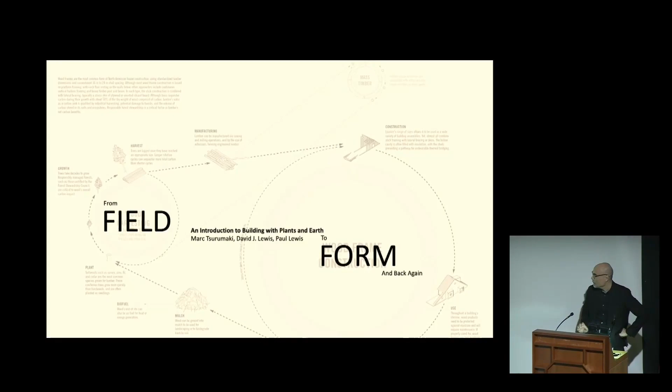If we look at the amount of carbon related to buildings, essentially it's 39% of global carbon emissions that could be subdivided into operational carbon, in other words, the carbon associated with the energy needed to heat, cool, and otherwise operate our buildings, at 28%. And then embodied carbon, which is really what we're going to be talking about primarily tonight, which is the carbon associated with building materials and construction. In other words, embodied carbon is the physical matter of architecture.

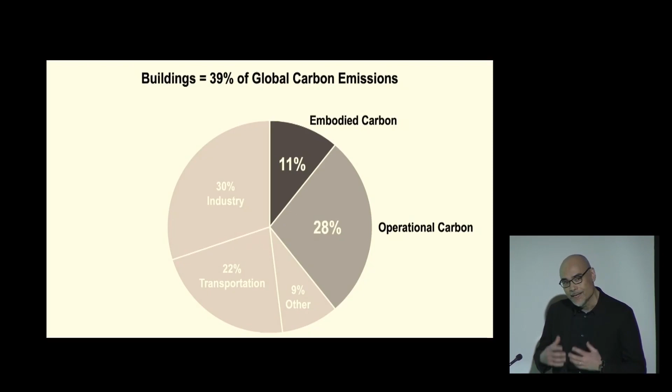Now that 11% may not seem terribly substantial, but if we look at this relative to the very tight timeframes that are required to avoid the sort of predicament that we're in, the percentage of embodied carbon moves to about half of the total carbon emissions that will be associated with new construction across the world in this critical time period of the next 30 years. And if we think about the impact of more energy efficient and highly thermally performative buildings, the importance of that embodied carbon increases. It'll be about 56% in that context.

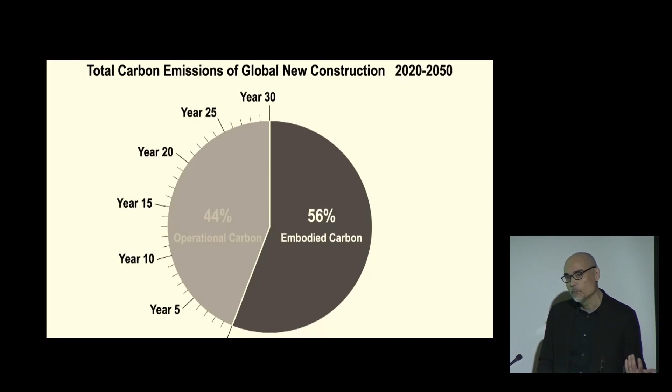So the other critical thing about embodied carbon is that it's upfront carbon. In other words, it's carbon that's already expended at the moment that the building is constructed. So it's already emitted or sequestered, whereas operational carbon accrues gradually over the lifespan of the building, placing even more critical importance on embodied carbon as a means to address the global challenges relative to climate change.

The other aspect of this, if we look at the next 30 years or so, in that same time frame, the predictions are that the world will be adding roughly 2.5 trillion square feet of new buildings. That's roughly doubling the global building stock in the course of the next 30 years, much of it in the global south. So whereas building less and reuse are really critical ways to think about reducing embodied carbon in the built environment, essentially this means we're not really going to reuse our way out of this situation, given the incredible demand for new construction.

So what does this mean? It ultimately means that we need to rapidly and radically rethink the material preconditions of our architecture. We need to rethink the ways in which we build and what we build with. This also means we need to reassess the legacy of modernism as it's been globally disseminated and its reliance upon concrete, steel, and glass, which are not only three of the most carbon-intensive materials, but also participate in cycles of linear extraction that have devastating impacts on environments and inequitably distributed effects on human health. It also places the architect as a kind of consumer of building products that are assembled into architectural form.

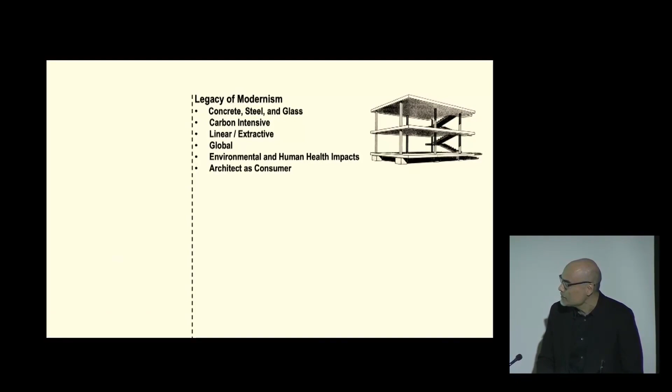By contrast, biogenic and geogenic materials require minimal carbon related to their minimal processing, and in the case of plant-based materials, literally sequester carbon within their very cell structure, allowing for the possibility for architects to reconceive their role as part of larger material cycles of flows of energy and matter within the environment that can actually have positive benefits relative to regenerative cycles.

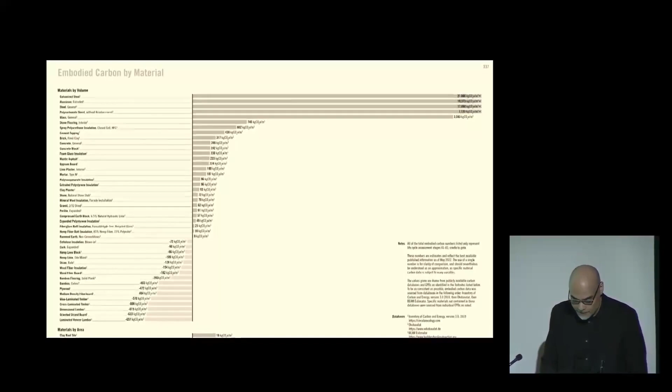And if we look at the carbon implications of this, one of the moments of good news in all of this is that these materials are already here. In other words, they're readily available, they're globally distributed, they're widely accessible, and often are the byproducts of other systems, agriculture, for example. And by and large, we already know how to build with them.

So they're inexpensive and plentiful, and they also offer up really amazing opportunities for rethinking the architectural basis of many forms of construction. In the case of the Manual of Biogenic House Sections, the publication that Rosalie is mentioning, we examine specifically the impacts and use of these materials to develop innovative architectures in the form of 55 houses culled from around the world. And this leads to another question, of course, which is why are we talking about houses? What's the relevance of the house?

It's part of the problem, arguably. We should be building less single-family houses. But in fact, the house, precisely because of its scale and its ubiquity, offers a kind of fertile proving ground for new material economies and for rethinking the ways in which we build.

And if we look at the impacts of roughly 1 million homes built annually in North America, shifting the ways in which we think about the material conditions of houses can have correspondingly substantial impact on the built environment relative to climate.

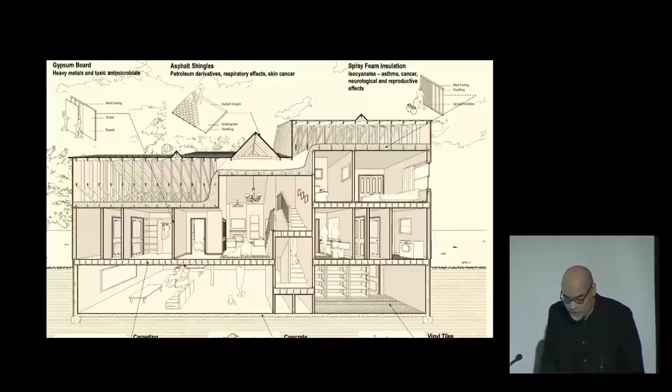But the way houses are built now is highly problematic. They've essentially more than doubled in size over the course of the last 75 years, and they're filled with toxic materials from heavy metals in gypsum board to PVC in vinyl tiles. These materials are predominantly the byproducts of the petroleum industry.

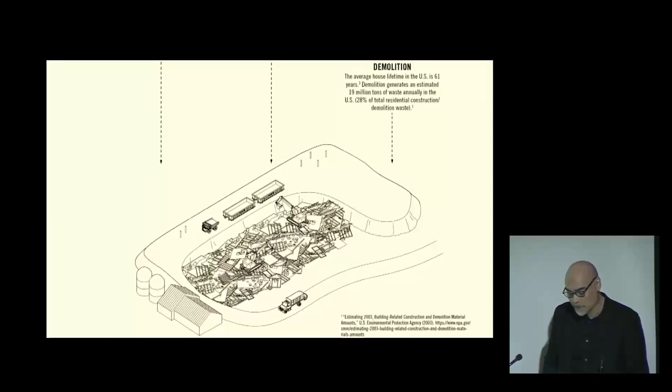They participate in take, make, and trash cycles, which are non-renewable and ultimately mean that most of these materials end up at the end of life as demolition waste and landfills. If we look at the composition of the wall, we start to realize why this is the case.

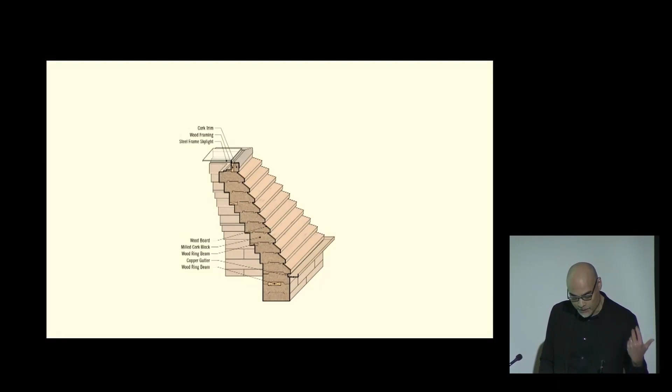So houses built with plant and earth-based materials frequently exhibit characteristics of extreme thickness, opening up the possibilities for a revitalized relationship between architects and questions of mass. They often exhibit a reduction of the number of material systems involved and tend towards the monolithic. So frequently in these buildings, a single material performs as structure, as skin, as thermal insulation, and as enclosure.

And these houses that we investigated also exhibit a wide variety of approaches to questions of interior and exteriority, gradients of relationships between inside and out, and nuanced relationships between the materials in use and questions of wear and transformation and entropy over time.

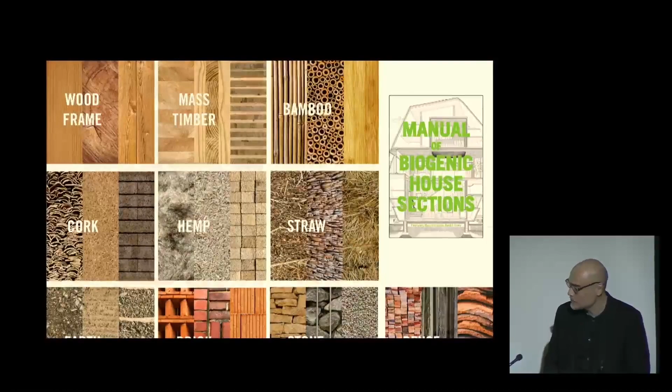The book itself is organized according to 9 chapters that correspond to 9 different material systems as well as reuse. And in each instance, we look at the carbon sequestering potential of the material and importantly, its relationship to life cycle, right? In other words, how do we go from the seedling to the plant to the building component to the house, back again through hopefully recycling and repurposing or back into the environment in harmless or regenerative ways.

So this is essentially the question of field to form, and it repositions the architecture not as a static artifact, but essentially as a temporary accumulation of materials that are part of a much larger circular logic that can be utilized to generate a transformed relationship between architecture and the natural world.

We also look at processing. So how does the tree transform into the truss, as it were? How do we actually look at the maintenance and care of natural ecosystems? And how do these processing conditions in terms of their intensity contribute to the embodied carbon or carbon sequestration of the material?

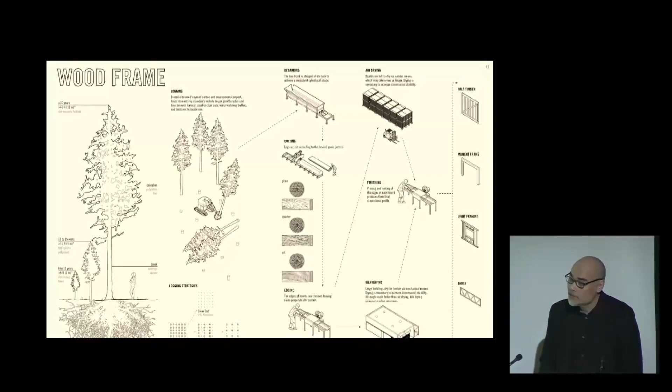And finally, we look through a series of axonometric drawings, photographs, and cross-sectional perspectives that were generated for the book at the architectural implications of these materials. So in other words, not only how do these houses simply substitute better materials for worse ones, but in fact, how do they actually use an engagement with biogenic or geogenic materials as a catalyst for new spatial and tectonic configurations, for new imaginative engagements, architectural responses to dwelling in the 21st century?

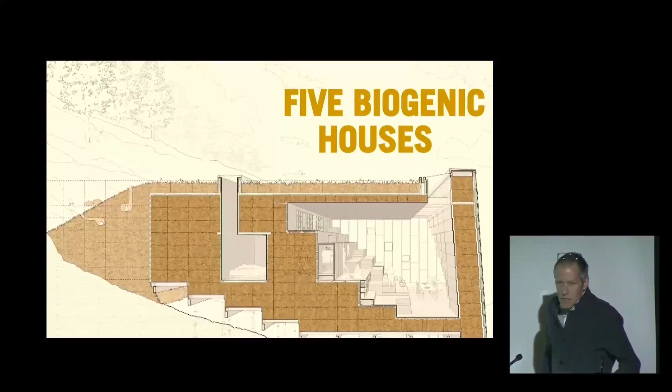So the project took 4 years of curating and collecting houses from around the world. And in that process, we also became curious as architects, how could we design from them as well? So we developed 5 biogenic houses, all plant-based, to explore the architectural implications through the question of field to form. Each of these tended to look at not one material, but actually combinations of materials.

In addition to that, we were interested in figuring out how that cross-weaves to the research we were already doing. So what I'll present and Paul will present is the material chapters, weaving together both the material from the biogenic house book, but also from our own design speculations on form.

First one is mass timber. Mass timber is in many ways the poster child today for plant-based buildings, because it easily seems to substitute for concrete and steel. But it has some challenges. Namely, it takes 30 to 100 years to grow, and in that process, even with certification processes, you have carbon loss in the removal of the tree and the disruption in the carbon in the soil, significantly offsetting some of the carbon sequestration benefits of mass timber.

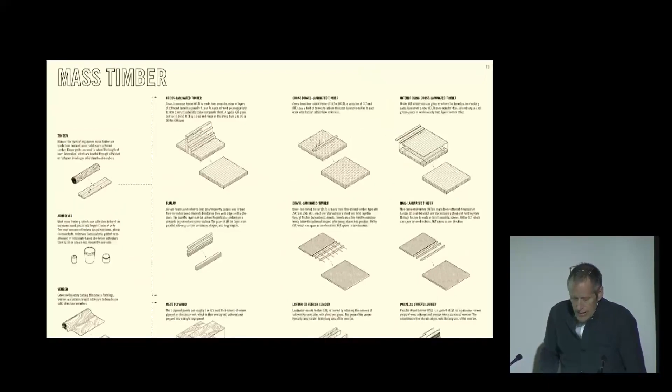You have in the mass timber the accumulation of different pieces, which also implies glues and their ability to be disassembled. That's why we're actually keenly interested in dowel-laminated timber, because of its capacity to only use wood and not use glue. The other is to pursue ways of thinking that isn't just a substitution for steel and concrete, but really exploring the capacity for mass timber to generate form.

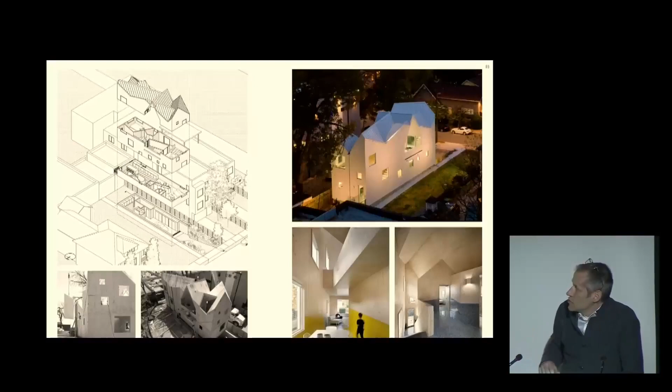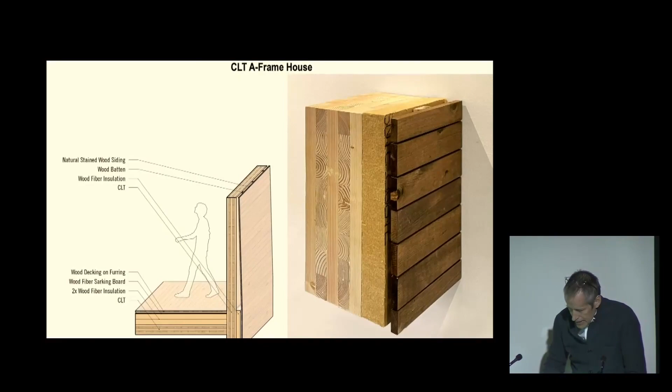In our own project, we looked at essentially how to really continue the exploration of the CLT plank, or the produced panel, in combination with wood fiber insulation and wood siding, to produce an all-wood project. Right? And in doing so, we were intrigued by that plank and the capacity for its length or its tallness to produce the architectural form. And these are the diagrams for the house designs, and they're intentionally circular, intentionally reflecting the idea of moving from a field condition to form and then back again.

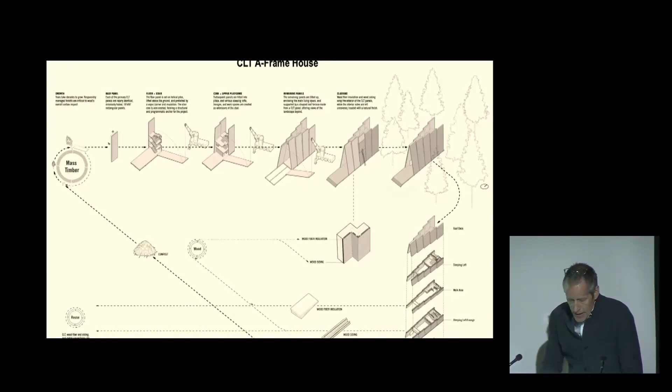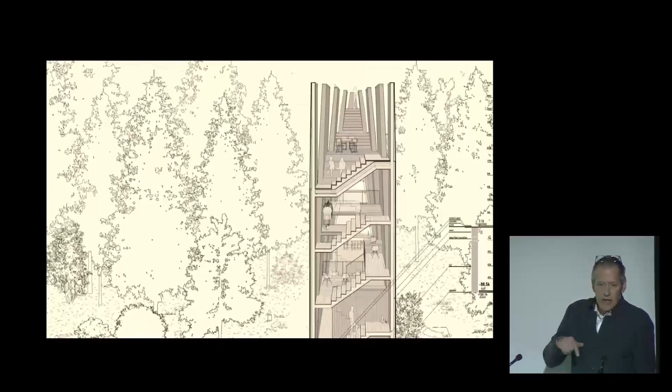In this case, the assembly is to minimally tool the CLT planks, tipping them up from the back, producing a vertical structure that houses the staircase and circulation in the back, and then as it moves to the front, becoming closer and closer, becoming essentially the A-frame form. What this produces then is not only a vertical structure, but the capacity to be up high in the trees, occupying the space in between the planks, and then within the building, seeing the nested cantilevered volumes for living and sleeping, all within a structure that doesn't have to have additional interior layers or additional exterior layers.

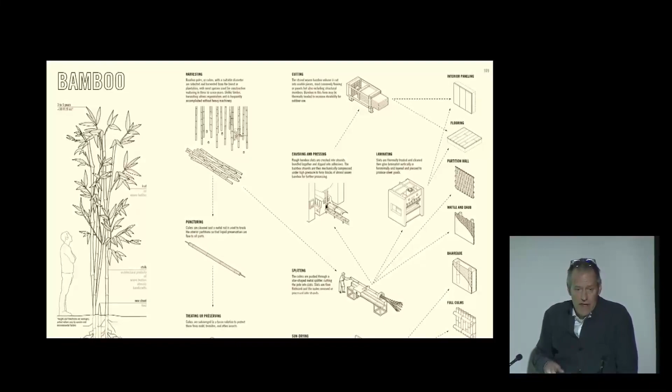Bamboo is another material that, while CLT is maybe limited by the slow growth, bamboo is not. It is one of the fastest growing plant materials. It's prolific. It has a higher rate of carbon sequestration than wood. It can exceed 60 feet in 3 to 5 years, and it's harvested not by clear cutting, but by thinning, given the rhizomatic nature of the root system. It can be cut into pieces, glued together, produce different forms. Also just the culms or the stalks themselves can be cut and used. Even though they have variation, which challenges some of the logic of standardization, it actually produces an intriguing structural unit to be bundled and assembled.

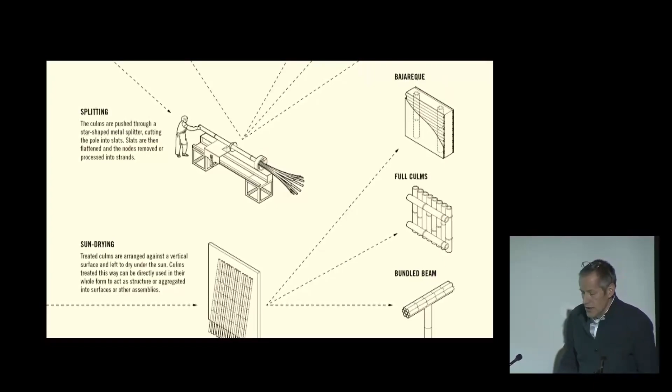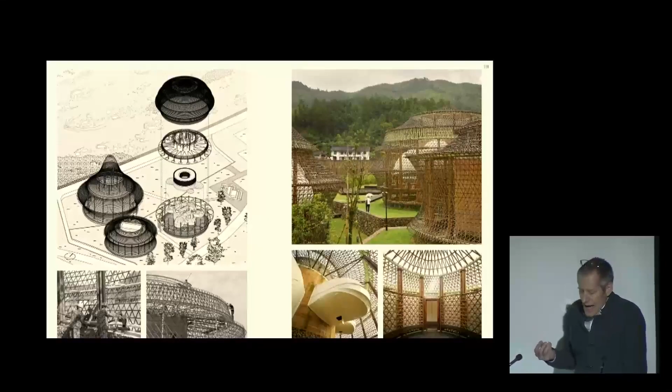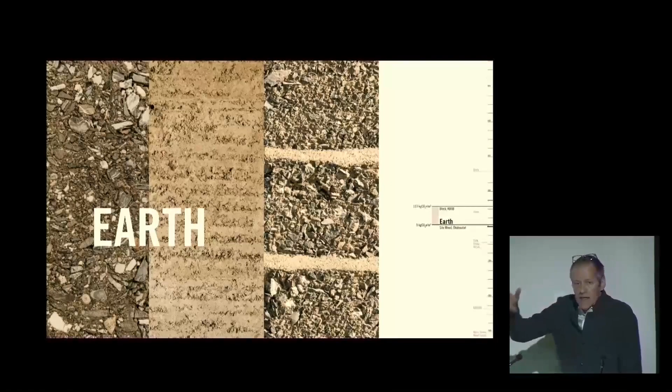This leads to the next material, earth. Although it does lack some of the ability to work in tension, like bamboo or wood, earth has the capacity to be load-bearing structure. It's also one of the oldest building materials, and one of the things that we should foreground is that this is not a new concept in many ways. It's really trying to reclaim some of the traditional ways of thinking, but now doing it with a lens to the future. It is an older building material, it's ubiquitous, it's inexpensive, it's inherently local, but also its thickness works as a thermal mass and it can absorb and balance humidity.

With clay as a binder, its carbon emissions can be relatively low. A lot of rammed earth, though, is often dependent upon high levels of Portland cement, effectively rendering it as a concrete. And so it's better to use lime or clay as the binder material. It moves from a liquid to a solid state, can be formed as blocks. It's very versatile and can be 3D printed. In the Wohnhaus Flury, as an example, the loam or the earth was combined with straw to form 32-inch thick, solid L-shaped cob walls, simply cut with a spade. Right? Revealing an incredible juxtaposition on the inside between the wood as this crisp geometry and the wall itself, the ornamentation being the earth from the site.

Detailing has to take into consideration its performance, in this case overhangs, to make sure that erosion doesn't occur. One of the fantastic conditions of this is its capacity to be mass, one wall, one material, as insulating, cladding, interior finish, all as one. And in this case, the structural loading is wood, and the straw and wood horizontal members decrease its embodied carbon to -55.3

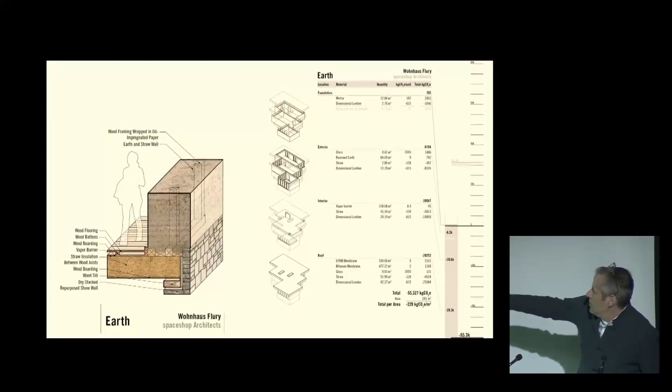metric tons of CO2e. In this project, 15,000 loam bricks, 4 by 8 by 16 inch, make the walls as well as the ceiling, vaulted ceiling. It's also a way of engaging local labor and skill. A very lightweight use of metal channels water, collects water, and organizes while at the same time providing protection.

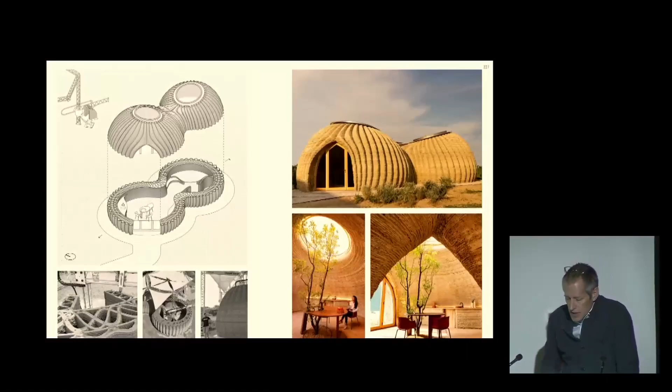Most 3D printing you may have heard about is using Portland cement or concrete. And one of the things that this company did outside of Bologna was to use earth itself and to print it in small half-inch layers over 200 hours to produce essentially a building system that through its cavities, multiple layers, is 30 inches thick and can be filled with rice husk for insulation, essentially producing a kind of mass product off of a local condition.

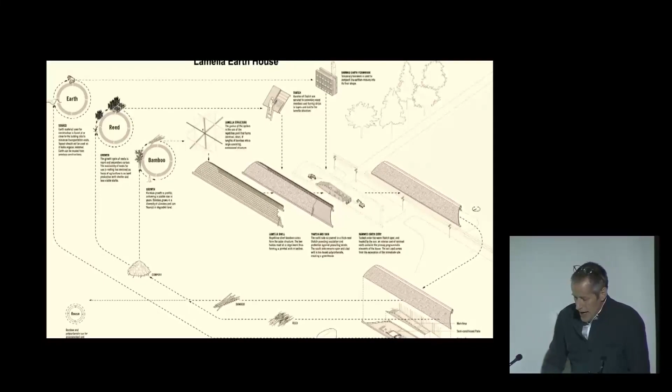In our own proposal, called the Lamella Earth House, we wanted to combine the efficiencies and strength of bamboo, the insulation of thatch or reed on the outside, with interior living quarters made from the earth itself. The lamella structure is essentially a structural canopy of self-similar parts with a same joint. In this case, 8-foot-long bamboo parts all joined together to produce a really efficient, really easy to assemble structure that extends and produces a long-spanning economic system.

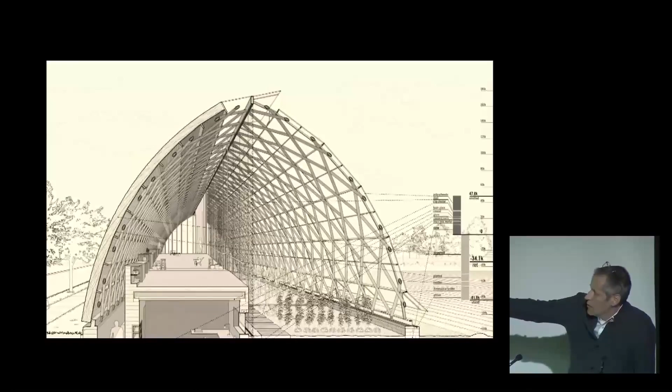Right? Thatch insulates on the north side. The translucent plant-based polycarbonate allows for thermal gain from the south, essentially producing a passively conditioned insulative space within which is lodged the dwelling, which is lodged not only in the earth but native to the earth itself of the site. Essentially what you get is a 30-foot by 292-foot long barn-like space, part greenhouse, part interior, part exterior, for a conditioned way of living on a site, essentially a different model of working, a farmhouse from field to form.

So the next three materials we're going to present are all primarily insulation, which is in some ways one of the more overlooked aspects of a building. But on the other hand, it's also a major site of carbon emissions, in part because some of the more common insulative materials are petroleum-based. So hemp itself is a fantastic material. It can be compressed into lumber, but more often it's used as insulation and for the mass of the wall. It grows extremely quickly, about 1 foot per week sometimes, reaching maturity in about 3 months. It has a long root system, aids in stabilizing and regenerating the soil, and it can be grown with minimal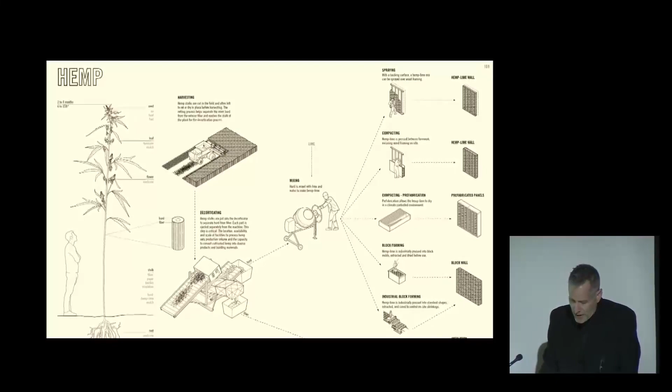water, fertilizer, and pesticides. It should be said that industrialized hemp, which is used for architectural purposes, is different than those grown for the psychoactive drug THC, but their association has led to the disappearance, in a sense, of hemp from the 20th century due to the war on drugs. The fibrous stalk is used for paper, textiles, and it's separated from the hurd by the use of decorticators. The hurd itself is combined with lime and water, produces hemp lime, which is sometimes inappropriately called hempcrete, which is durable, fire-resistant, rot-resistant, humidity-absorbing, acoustically beneficial, and an insulating material. But it is not a replacement for concrete.

It can be used inside a wall by either spraying it in or compacting, or it can be made off-site in prefabricated panels or formed into blocks. And I'm looking forward to John Sara, who will present much more detail about this fantastic material.

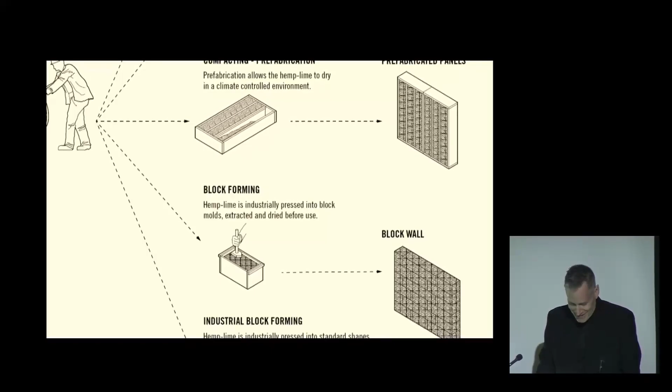Cork is also an amazing material. It's multi-purpose and it's extraordinary in many respects. The downside to cork is there's a limited quantity and it takes a long time to grow, and it only grows in certain regions. So it gets harvested from the bark of cork oak tree about every 9 to 14 years, but it's water resistant, provides thermal, antifungal, acoustic, sensory. If you love the smell of cork, you'll love a cork building, and it also can have structural capacities.

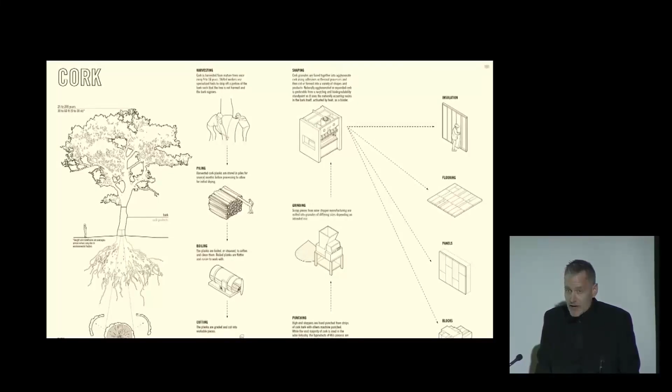But most cork oak is concentrated in the Iberian Peninsula, and the cork in building products is often derived from the excesses of the wine bottle stopper industry. But in this kind of fantastic project that we're looking at here, almost the entire building was built from just cork.

It's a monolithic material that is the structure, it's the interior finish, it's the exterior, it's the insulation. There are 1,268 CNC milled blocks that are interlocked into 5 different corbelled roofs that enable the blocks, in a sense, to enclose the space.

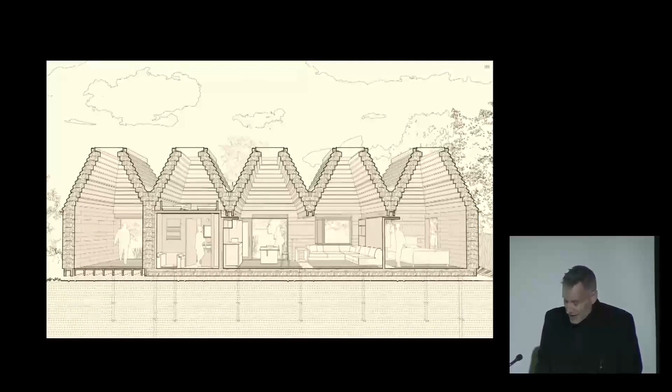And again, the downside with cork is really there's just not enough of it, and it grows too slowly in too few places. On the other hand, straw is everywhere. It's ubiquitous around the world. It's a waste product from agriculture. To grow straw does not displace any other food source. It's already there, and it's often left to decompose and let the carbon back into the atmosphere. So the question is, how can we actually delay that and embed the straw within the building?

It grows fast. It's cheap, plentiful, it's resistant to rot, and can be used as everything from insulation, where in a sense the air voids within the straw work to produce the insulative capacity, but it also, if sufficiently compressed, can also be a load-bearing structure.

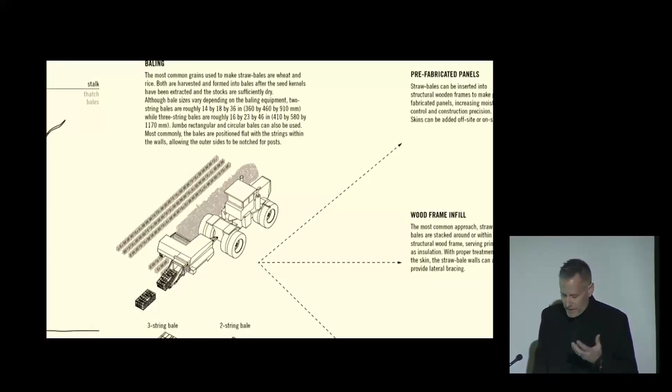So there are 2 key processes that enable straw to be a viable building material. One is that binding, that kind of compressing, often done through baling on the field. So they're highly compressed into units already. And the second is the plastering of the surface with clay or lime to form resistance to fire, rot, moisture, vermin, et cetera, and also increase the capacity to resist vertical loads.

The most common types are what's referred to as the Nebraska load bearing, basically stacking the blocks up. And this refers to the origin of this type of construction in the late 1800s when there was a lack of trees, so buildings were built from straw bales in the plains of Nebraska.

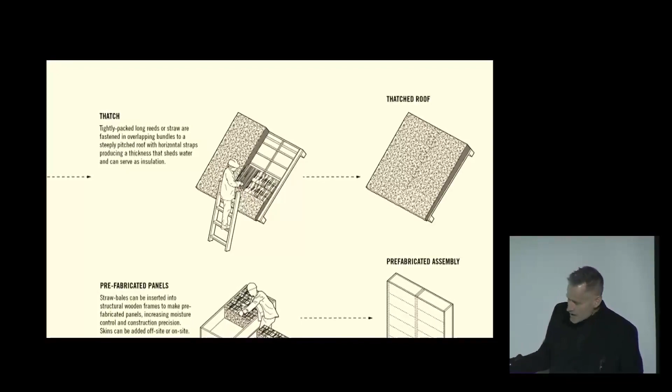It can also be used in filling an existing structural wood frame, using the straw as insulation and also the support for wall surface. It can also be built into prefabricated panels, and in some cases compressing the straw even more, which increases its capacity to resist fire. The thatch roof associated with straw is slightly different, uses a different reed, and is harvested into bundles and would be the subject of a different talk.

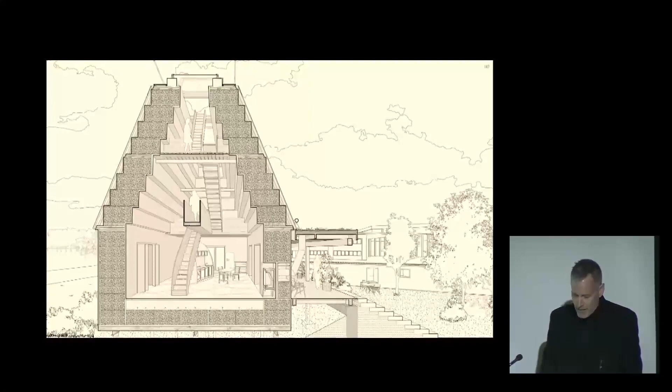So in the last two projects we'll present, we were very excited by the possibility of not just using straw, but taking advantage of the possibility of thickness as a catalyst for rethinking domestic space. So with the straw bale spiral house, we effectively thought about how we could join two slightly contrasting materials, CLT and straw, with the CLT, in a sense, carving voids out of the mass of straw.

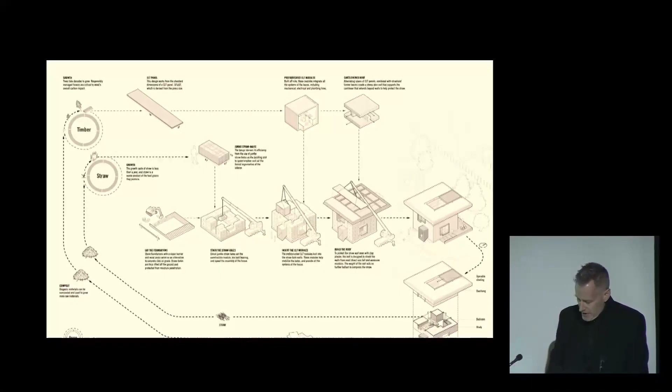In a sense, this very small house is defined by a kind of donut or a hole that exists in the middle of a stack of jumbo bales, which measure 4 bales of length in each direction and 12 bales high, about 200 bales. Small prefabricated CLT modules, really open tubes that are placed within and around the bales, stabilize the bales, and also form the interior of most of the rooms of the house.

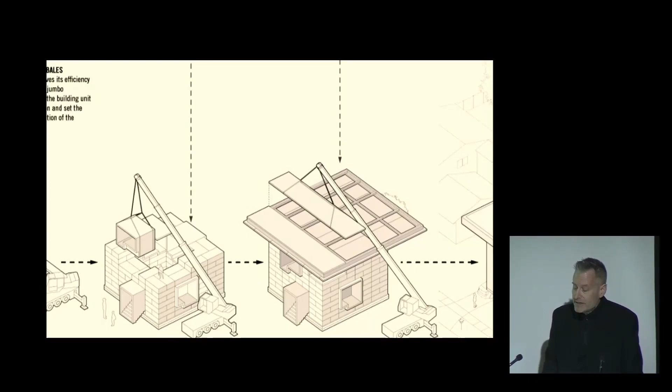A CLT stress skin roof cantilevers over all sides of the house, in a sense protecting the straw's clay plaster from erosion. And a central skylight continues that central void and allows light to come in from above. The spiral of CLT boxes forms the primary program of the house, which are linked into a continuous spiral moving from the front door to a roof terrace.

In a sense, the CLT effectively skins the interior of the straw, takes away space from the straw. On the other hand, the straw insulates and reciprocally supports the CLT. As each of these CLT units is open to the two sides, the interior space is all connected through the thick wall to the exterior. The house is both porous and thick.

The last project, entitled Mass Straw House, we wanted to find a way that we could make a house that was actually more mass than inhabitable space, to sequester as much carbon as possible, use as much straw as we thought was appropriate.

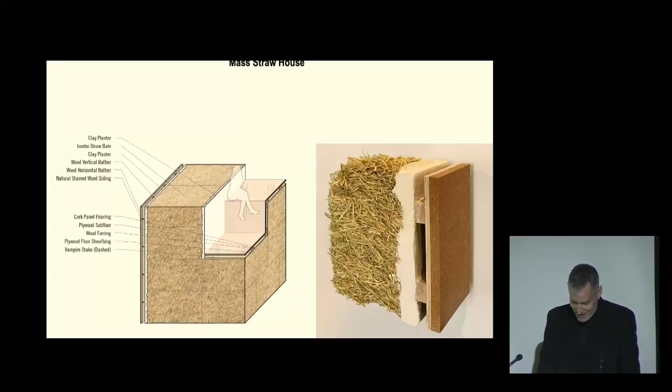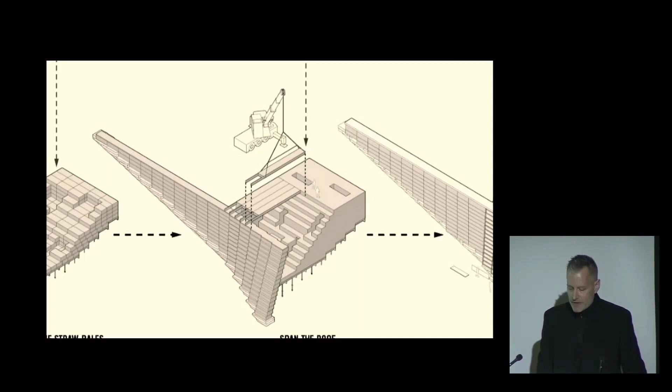So the house is formed really by two different stacks of jumbo bales. One is a long wall perpendicular to the slope of the site, whereas the other is a stack of straw bales which form a kind of terrace form. And these two are connected by a timber box beam that essentially anchors these two structures to each other and provides a substrate for a roof of clay plaster and an additional layer of hemp fiber panels.

Furthermore, we kind of laid unprotected straw on top of these layers to, in a sense, decompose back into the site. I think one of the anxieties about straw in particular is that somehow it's going to be the source of animals, and we said maybe that's okay. We could actually allow the mass of the house to decompose into the site.

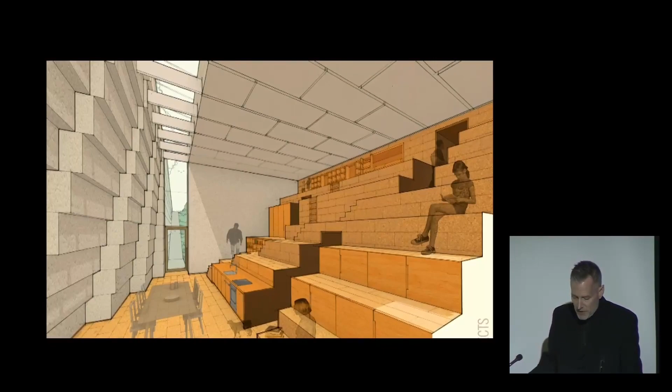So the main space of the house is between these two assemblies of straw, with the private space of the bathroom and the bedrooms burrowed, in a sense, into the excess mass of the straw, with the surface of the straw in the central space lined with cork. So we end up having a kind of stepped interior landscape for the small house with access to the bedrooms and the bathroom from the stepped collective surface.

So here in these two projects, and in this project in particular, thickness, which is in modernist kind of idiom, is conceived almost in a kind of negative term. It's indicative of a lack of material optimization, and therefore it's inefficient. Here we're exploiting it both for its peculiar spatial qualities, while the excess use of agricultural residue results in significant sequestration of carbon.

So we believe that there is an important kind of transformation of the material basis of our built environment that has to happen, which also expands the role of the architect to, in a sense, embrace the full cycles of materials from field to form, and also to kind of optimistically embrace these productive potentials.

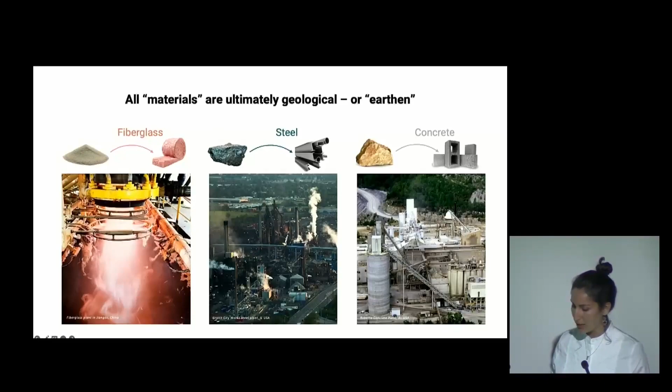Well, not exactly, you know. There are energy transformations that we need to account for that require substances that are more concentrated than their environment to go through chemical, thermal, and energetic work that is needed to create materials that we call processed, right, that are less natural in a sense.

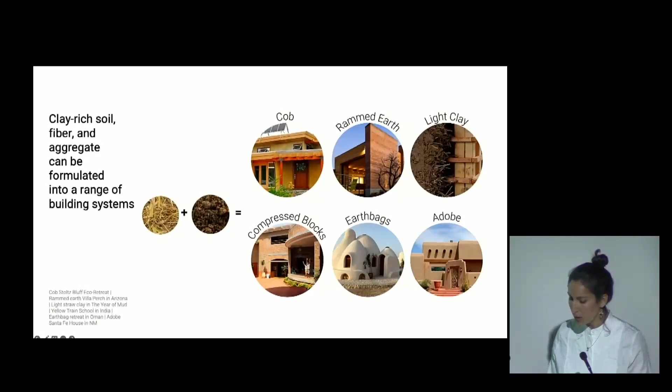So earthen materials use raw, unfired clay-rich soil as their base binder, fibers as the tensile strength provider, and aggregate as a compression strength provider, allowing for a range of thermal possibilities, geometrical variations, using these non-toxic, community-engaging systems that are easy to learn. And a lot of the work with earth materials is about finding the mix design, the right mix, characterizing and testing the rheological, thermal, structural, and durability properties of the material.

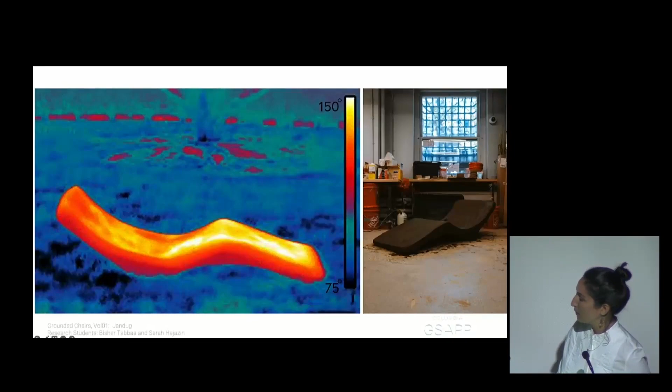And this is an example where we obtained different fiber content mixtures to create a lightweight, radiant, heated structure, in this case, a small-scale chaise we call Jandug, or body in Aramaic, part of a series called Grounded Chairs that was all about thermal, heated, sculptural sitting.

This chaise had radiant heat veins that pumped heat and energy into the chair, and as you can see in the thermal imaging, the model sitting on it mentioned it was like sitting on a piece of land warmed by the sun, which is kind of what it was. So in the remaining couple of minutes, I want to discuss 3 case studies of examinations for earth materials: keeping earth raw, making earth lightweight, and then making earth flexible.

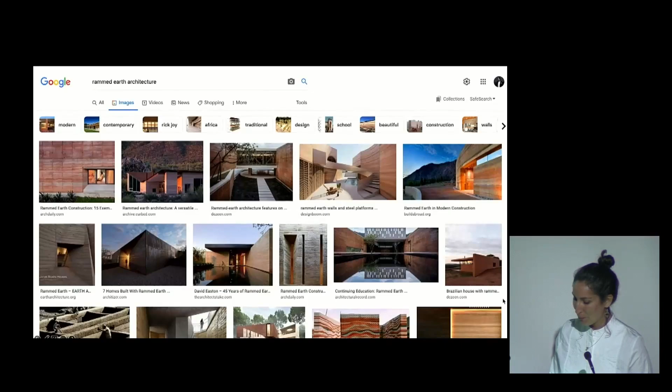What does it mean to keep earth raw? So rammed earth is not a marginal technique anymore, but many examples, as you discussed, Paul, are stabilized with Portland cement, approximately between 3 to 7% Portland cement. And there are many reasons why stabilization might be good for rammed earth, for durability, for working with a material that is more wet. But given the thickness of rammed earth, there comes a question then about the absolute content of cement. 3 to 7% of a very thick wall might be the same as a very thin concrete section.

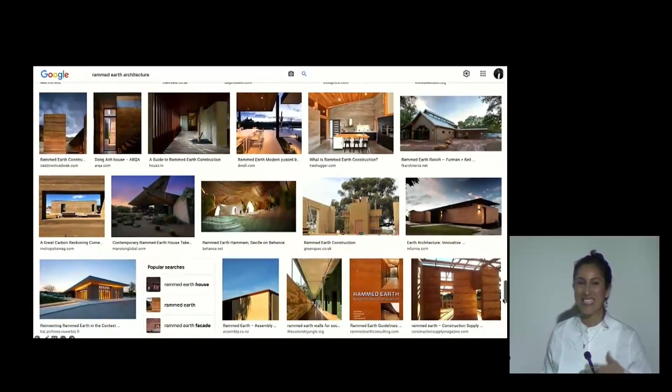So we call these in the natural building world rammed concrete or rammed clay concrete or dirty soil. And the question is, can we keep rammed earth raw? Is there a low-tech technology that we can use instead of the cement? And when I say low-tech, I mean a simple solution that performs in complex ways.

And it's the work by Martin Rauch in Austria, who is highlighted in your book, that developed or reinterpreted the systems of lime checks. So instead of stabilizing, you create a check every 4 or 5 lifts using lime or stone plinth, and the lime check slows down water erosion and wind-driven rain. And with time, the exterior clay layer is eroded and the aggregate is exposed, creating a more texturized surface, therefore further slowing down erosion. So it's an exponential, mechanical, self-stabilizing mechanism, which we wanted to check.

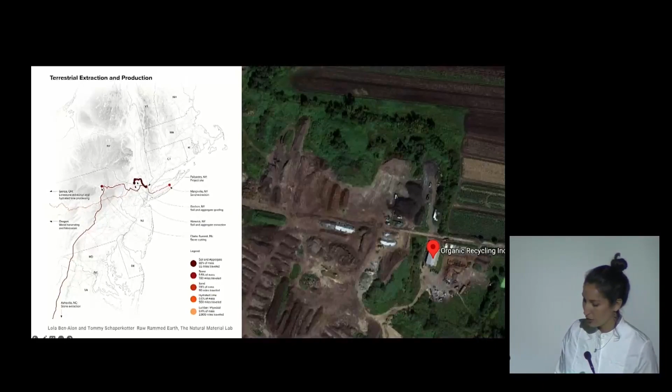So we went to Lamont Doherty Earth Observatory and harvested soil from a nearby quarry, taking samples and testing the soils. And right at the entrance to the Geoscience Building, which is one of the research hubs to discover plate tectonics, this raw rammed earth emerged with no cement. And it uses completely raw earth, rammed pneumatically and capped with a marine-grade wood, which is now a living laboratory for raw rammed earth erosion. And this is after 7 months, and it's doing fantastic. It's not melting as the scientists in the building were afraid of.

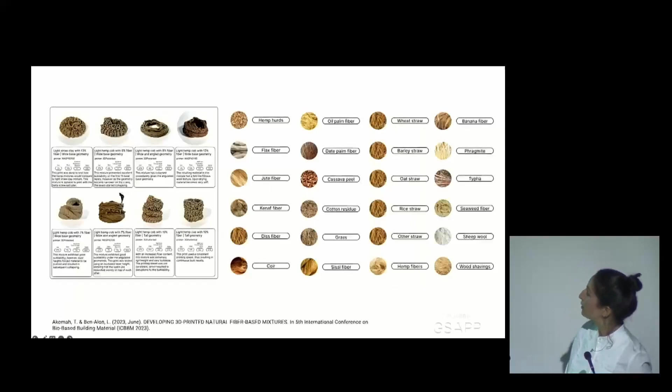The second case study about making earth lightweight really relates to the multiple 3D printed earth technologies that are emerging, and the WASP Tecla example in your book looked at these inspiring advancements. And at the lab, we asked ourselves, how can we expand mix designs to rethink the weight, the thermal possibilities of 3D printed bio and geomaterials? And through an iterative process full of failures and successes, we are asking, how do we make this work also code compliant? How do we develop a range of mixtures from lightweight to insulative to massive, easy to handle, to ship, and to comply with building codes?

And this is one example of a piece we created from the light earth mixture we developed that is at the lab, so you can come and visit. It's hanging at the ceiling.

And the third case study about making earth flexible really started with an experimentation of earth as a wearable substance, creating earth skins that lent themselves to shape and sculptural form, or sculpture directly onto one's body. My dream is to be immersed with soil, with mud as much as possible. And we realized that wearable substances require flexibility. So we asked ourselves, how do we make soil flexible? How do we make a fabric made of earth?

So we created different recipes using algae to create a mix design comprised of 60% raw soil, sifted in a traditional technique used hundreds of years for pottery, to wear and be immersed with the soil through transcorporeal movement that affirms the agency of matter. We tested 3 processing techniques, essentially laser cutting, embroidering, and stitching, so using soil as a medium to perhaps heal the separated terrestrial perception of earth material.

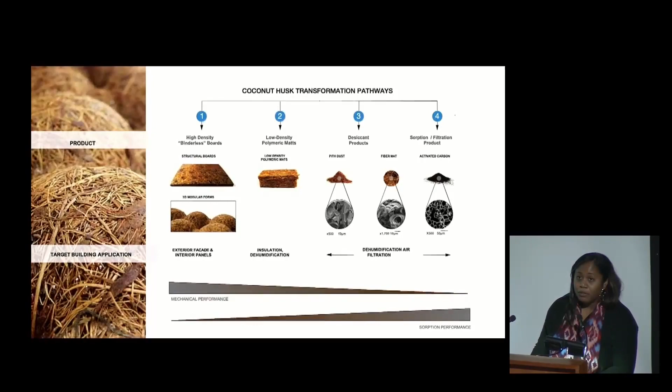Firstly, for designers and architects, one of the greatest opportunities is how we might be able to generate value and extend the lifetime of diverse biomass streams through the design of a range of building material products. How flexibly can we engage these pathways of transformation from each agro byproduct and match them according to local or global demand? The second is also to think about how multi-crops instead of homogeneous crops might be used to generate a whole series of performances that we saw today: thermal, structural, acoustic, within new building technologies.

How might our reacquaintance with the plant and fungi kingdoms allow us to explore reducing embodied carbon in building material production? So understanding the relative amounts of cellulose might inform us to process it by feeding it to fungal materials that do very well with digesting cellulose to yield low carbon and low density mycoproducts. And stuff that contains more lignin can be pressed into structural, more mechanically robust materials. So a quick clip of mycelium eating hemp over the course of 5 days. And how might these open up new sensory probiotic spaces where insulation is not hidden behind walls, but used to line our interior spaces?

The second and third opportunities are very much mid to long-term ones. The second lies in value translation and involves how we might collaborate with other actors, from farmers, new types of eco-manufacturers, building owners, and managers, to translate existing forms of capital and generate new forms of value that are being brought to the table.

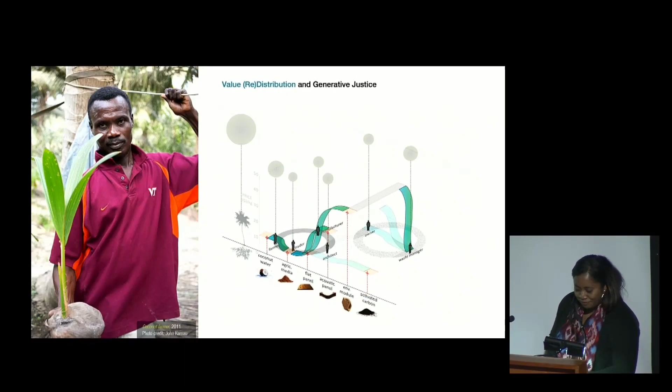So in my 8 minutes, I'm representing my colleagues at the Health and Materials Lab and our obsession with this material hemp lime. In addition to being kind of inspired by materials, we are driven to bring materials to building that do not cause human bodies harm or any body's harm, any life harm, and also low carbon. So I'm just going to dive into this material that we've arrived at through the lens of reducing toxicity and reducing carbon, and we think it's kind of a superfood for the building economy. So it's the hemp plant and the limestone that brings these together.

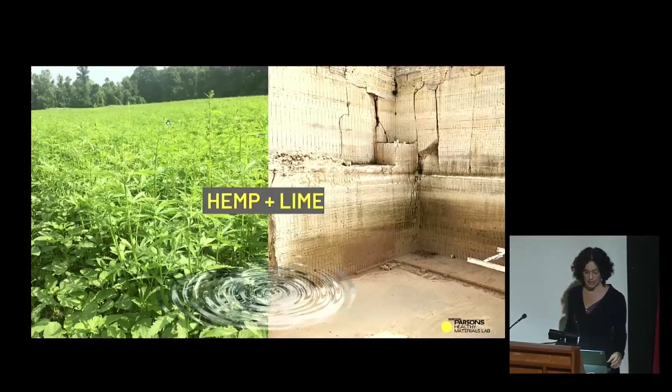The hemp plant, as Paul described, is a plant that grows quickly, absorbs carbon from the atmosphere, grows in nutrient-poor soils, regenerates the soil itself, requires very little water to grow, and doesn't need herbicides or pesticides, reducing toxicity. Limestone is an abundant stone that can absorb toxics and carbon from the atmosphere. And the hemp plant actually absorbs more carbon than trees. As it's growing, the hemp captures that carbon, but actually when it's dried and cut, that interior of the stalk is the part that we use for hemp lime.

Limestone, on the other hand, is found in nature. It makes up about 8% of the Earth's crust. And it's found in geologies around the world. And it's been used for centuries globally. Here's an example of where the limestone is found in Denmark on the east coast at the edge of a sea. And when we look really closely, you can see in those cliff layers, there's evidence of fossil remains of animals like sea lizards and sharks and cuttlefish and tiny algae, which then are compressed over millions of years. This used to be covered in a sea 65 million years ago. And the debris creates this limestone, or chalk as we know it.

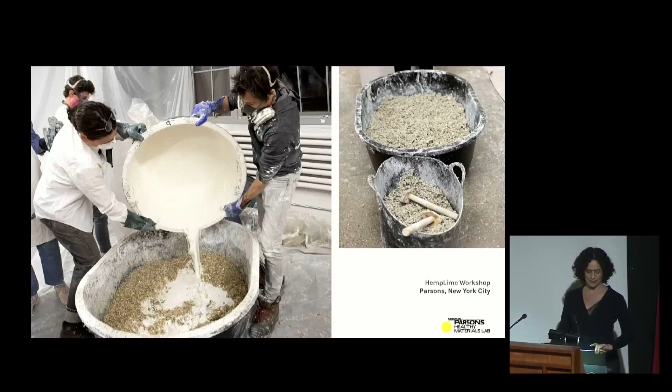Then when it's cooked in a hot oven, the limestone changes its molecular structure and becomes what we know as quicklime or calcium oxide. That then, with a little bit of water, makes paints and plasters and mortars. Mixing that hemp with the lime becomes hemp lime. And as Paul said, it's also called hempcrete, but we don't like to call it that way because it has nothing to do with concrete, except maybe it's a little bit of an ingredient, but it's not structural by any means. It has all kinds of amazing qualities, hemp and lime. I was going to go through them. Paul listed them already. I think I'll just go very quickly.

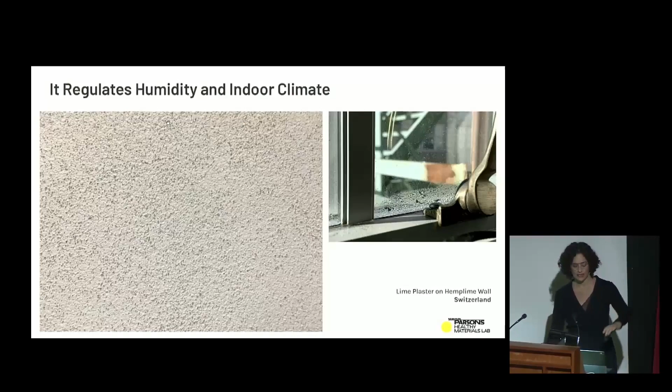It's recyclable. You can use the waste to make new products. It thermally regulates in a wonderful way. It also regulates humidity and indoor climate, which is interesting because it makes a breathable wall or vapor permeable, meaning it makes places feel better. It absorbs humidity when there's abundant water in the air, and it releases humidity into dry spaces. It's also very effectively sound absorbent. When it hardens, it's like a stone, it's like limestone, so it makes it very hard for pests to get in there, and mold cannot grow. And it lasts for a long time. This is a 600-year-old bridge that was found that uses hemp and lime mortar in its laying.

It also absorbs carbon from the atmosphere for the lifetime of a building, not just in that one moment of building. So it makes for a carbon neutral or even carbon negative building. I think LTL covered this really greatly. We've done a deep dive into hemp lime for several years, and there's a few things I've just pulled to share with you that are really important to note.

That hemp, even though it only became legal to grow in America a couple of years ago in 2018, has been grown here for thousands and thousands of years. Indigenous people have grown it and used it for all kinds of things for a long time, and the knowledge is still there. And also, in early American times, the hemp growing that happened was on the shoulders of enslaved people, and the knowledge of how to process hemp by hand disappeared with their know-how.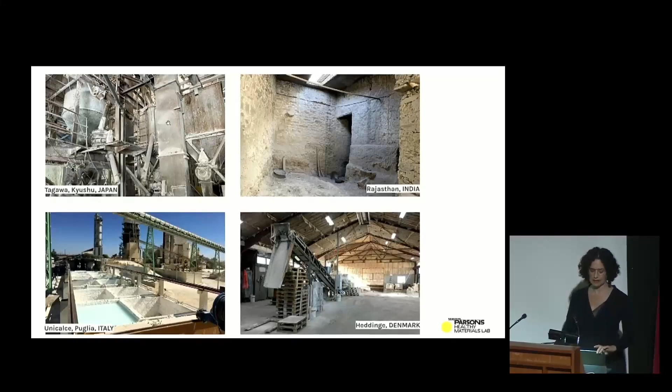And then in terms of the limestone, it's been used for centuries, again, all over the world, developed independently across continents before the internet, before anybody shared information. Each culture specifically had their own recipe for how to make usable lime plaster, paints, mortars. Now, laboratories are perfecting the limestone ingredients to be mixed with hurd from the hemp plant to make building materials. And in Europe, there's several companies casting hemp lime into panels and blocks. This is only now happening in North America. They're used for new buildings and also to renovate or restore old structures.

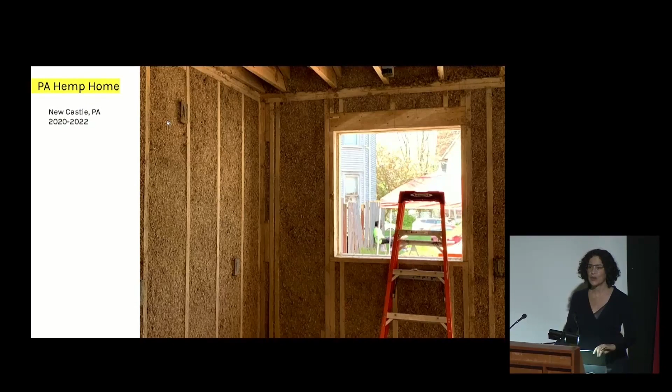So here comes this project that we want to share with you. It's called the PA Hemp Home, the Pennsylvania Hemp Home, which began in 2020, and we just closed construction last summer. It's a collaboration of several folks. Dawn Services is a small affordable housing provider in New Castle, Pennsylvania, and they invited us to collaborate on the project because we share a vision that the whole system that makes hemp lime buildings could make healthy, affordable housing and invigorate new economies for small towns, and maybe be an example for the rest of the country.

Dawn Services works with local farmers and began growing hemp in 2019. They planted 14 acres, experimented with 2 seed varieties, and tested lots of planting methods. The Pennsylvania Department of Agriculture gave Dawn Services a grant to build this building, which is really interesting. There's the agricultural department and a building project to retrofit an existing home with hemp lime, which we believe is the lowest carbon intensive way, and also to conduct research and testing that will support the acceptance of hemp lime into the International Building Code.

So here's the little house that was purchased by Dawn Services to be used as this prototype retrofit. Of course, the existing materials in this house are mostly derived from petrochemicals, but when they're peeled off, what's exposed, of course, is the old wood. The initial idea was to keep those wood studs in place, fill that wall cavity with hemp lime, plaster it on the inside with lime plaster, stucco it on the outside, and make a 3-layer wall.

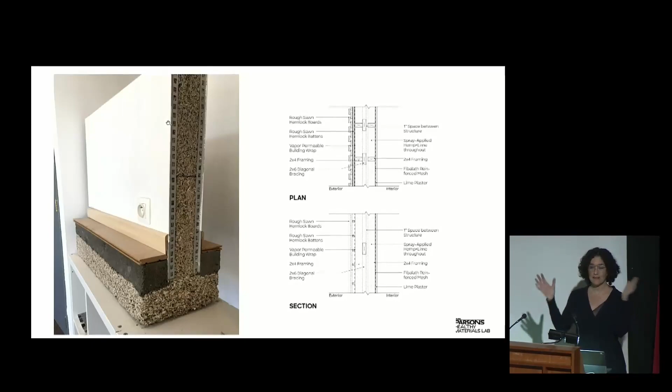That was the idea, but things got really tricky during construction, and there needed to be a second layer of studs inside, and the contractor said it's like building a house inside a house. And it took a long time. And this is the house as it's being prepared to have hemp lime sprayed in it.

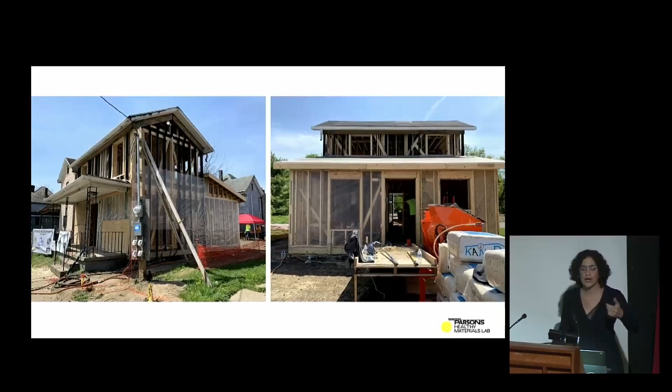This is the process. This is the mixing machine called the Mud Hog, and really it's just hemp, lime, and water. The valve on the right measures carefully just the right amount of water so that the hemp lime will retain its insulatory properties. It gets shoveled into this trough. This is all very makeshift on site, and then pushed into a pneumatic tube, so the hemp lime is then blown into the wall cavity between those studs.

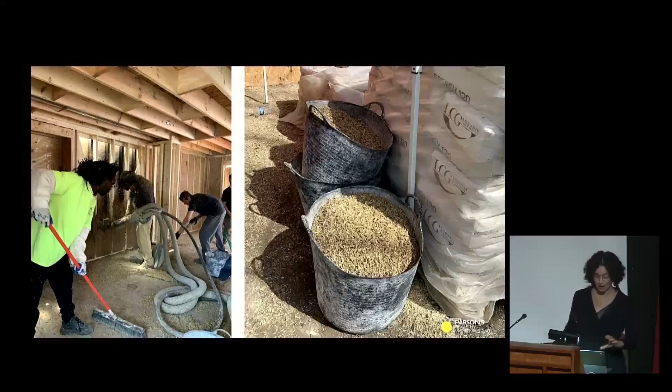And all of the scrap that doesn't make it into the wall gets put into these buckets, and then those buckets get poured back into the Mud Hog mixer. So it's completely recyclable. Here's the wall that's fully packed. It's kind of beautiful as an insulation wall, and then bits on the outside were packed by hand. And here is the house fully blown.

It took about 2.5 days, but had to dry a while, maybe 2 months, maybe even 3 months, I think, before the next stage. So the dry time is dependent on the local climate and weather. The plaster was lime with a heavy dose of hemp, actually.

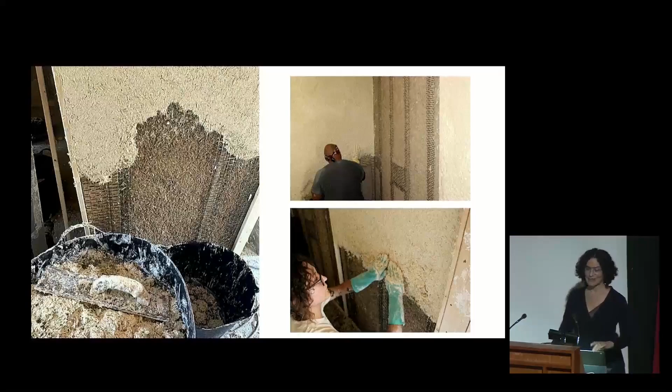And there were a lot of issues in this mix. So like others have said, the mix is really important. And then the walls were finished with a finish coat of lime plaster to create a thoroughly breathable wall. And it's interesting to say that the lime plaster actually came from Pennsylvania also.

Because the dry time was very slow, instead of using stucco on the outside, we had to use a rain screen, which my colleague Alison Mears brought out as that solution. Well, why don't we just cover it with a rain screen and let it dry inside so that the construction could continue. So there were a lot of takeaways from this project, which were really interesting.

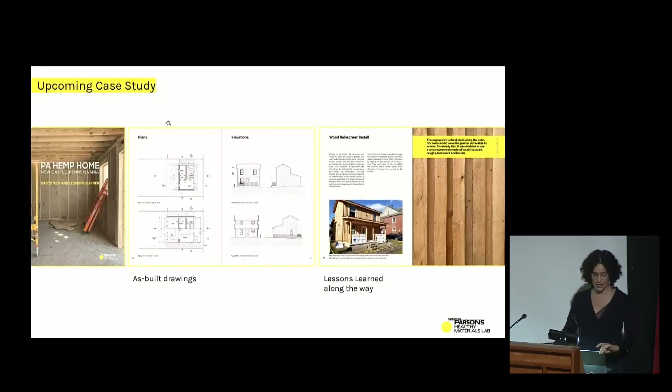One, of course, is this dry time, and it's a huge challenge for constructing in this way. But what we found during our research is that precast products are really the way to go. And so at Healthy Materials Lab, we have a good dose of ambition. We decided to produce our own kind of prototype, and we produced a bunch of hemp lime blocks here in the United States after seeing them produced in Europe.

And the hope is that in the United States and in the future, there will be production facilities that make these precast hemp lime products in large quantities, and ideally in regions near the farms. When we made this house, there wasn't an acceptable building code, which slowed the review time, of course.

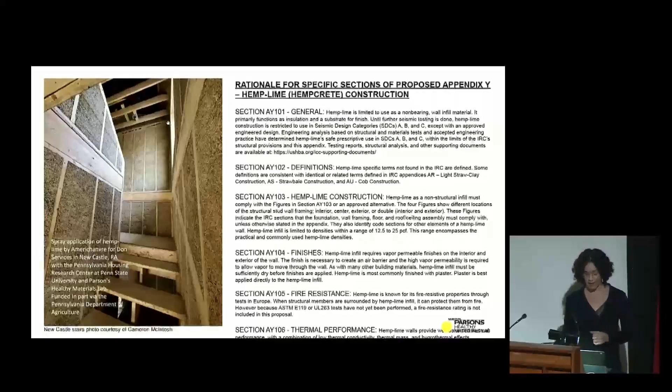I was really excited to see that the PA Hemp Home actually is used as an example and in supporting documentation for the proposed hemp lime construction appendix for the IRC. And we acknowledge the many people on the U.S. Hemp Building Association who advocated for hemp lime, and now, this summer, it was announced that it will be an appendix for the 2024 International Residential Code, which is really exciting.

At Healthy Materials Lab, we mapped the system that would need to be created to make this a viable industry in the United States. We visited farms in New York and in Pennsylvania and Kentucky and Italy to ask how can this industry be ignited for the future. Farming's gotten easier, but the equipment to harvest is still really a challenge. The plant is really tough and gummy.

Talking with farmers, there's developments in hemp agriculture, but still challenges they face: finding the right seed, the right way to sow, the right way to harvest, ret, and bale the hemp. Decortication and processing is growing in the United States, but it has potential for growing much further. There are new industries that will support job creation, workforce development, but they're not yet thriving here in the US.

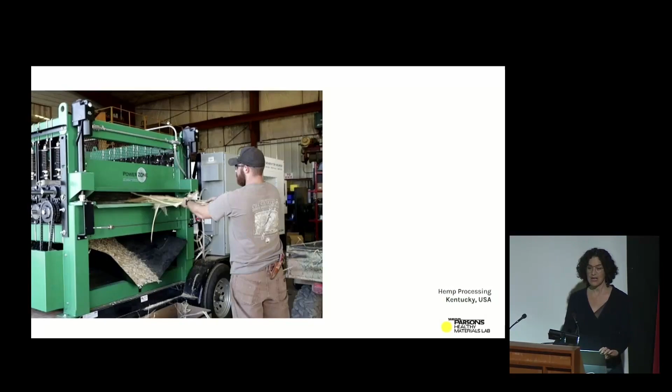The other facilities that will create jobs are these facilities that produce hemp lime precast products. And there's an opportunity to reignite the masonry trades. And actually, we've been in touch with the International Masonry Institute, who's keenly interested in hemp lime.

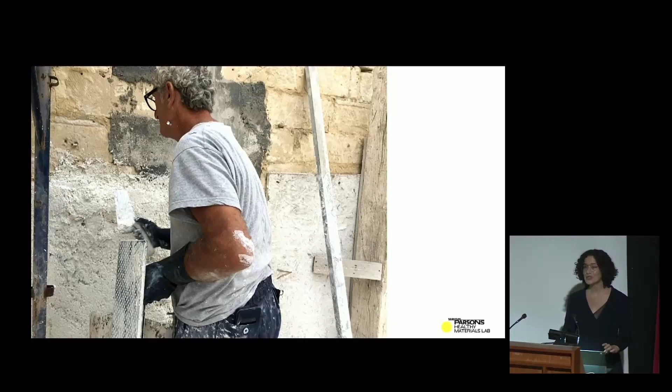So you see that the hemp lime used on this PA hemp home was actually imported from France. And this is a problem. We need it to happen here. But we do believe that it can happen here, and it will, and it's on the way to grow.